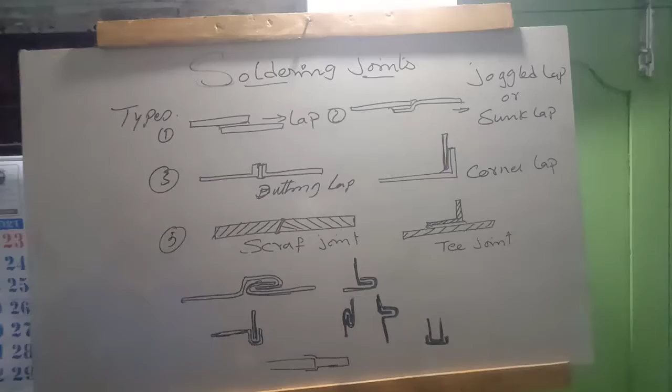Different types of soldering joints, by using sheets of different metals, we are making different types of joints.

First one is lap joint. Lap joint is where one sheet is kept on the other sheet, overlapping one over the other. This is called lap joint. In between this, the metal will creep and solder will melt. This is solder, the same way here also solder.

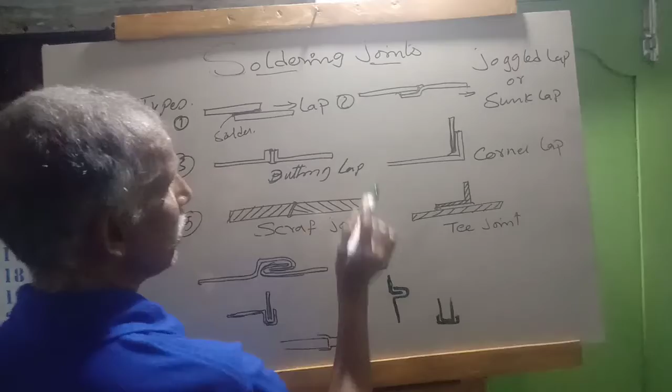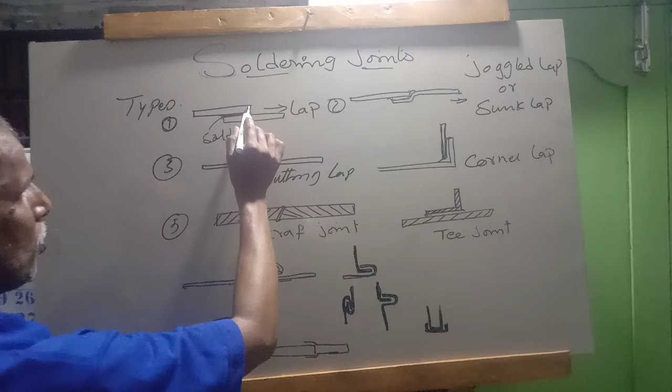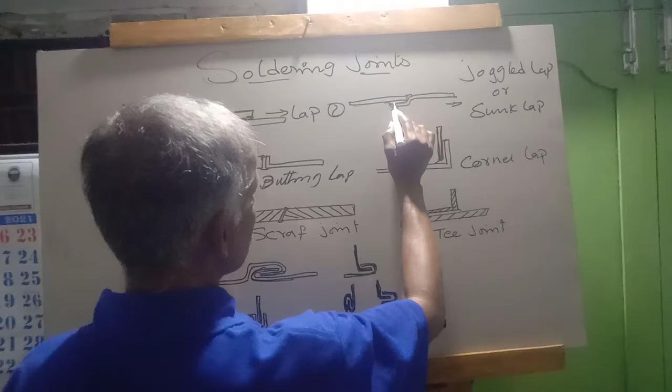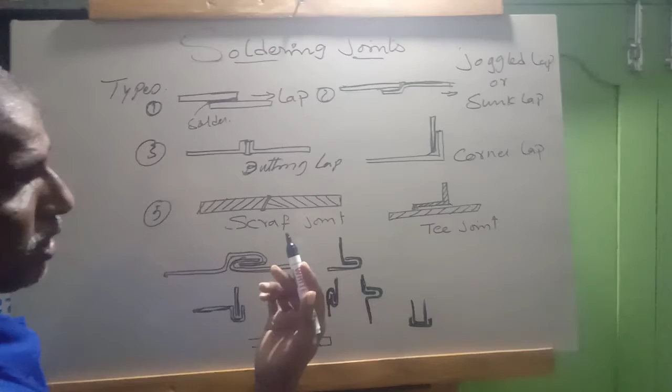Now the second one is a little different from this same lap joint. In this lap joint, a step-like portion is formed at the joint. But in this other type, the step-like portion is avoided and the sheet is bent a little bit to make the surface level. So the outside sheet will appear merged like a single sheet, but inside you will have the step. In the first type, the step-like joint will be visible; here it will not be visible, it will be merged, straight like this.

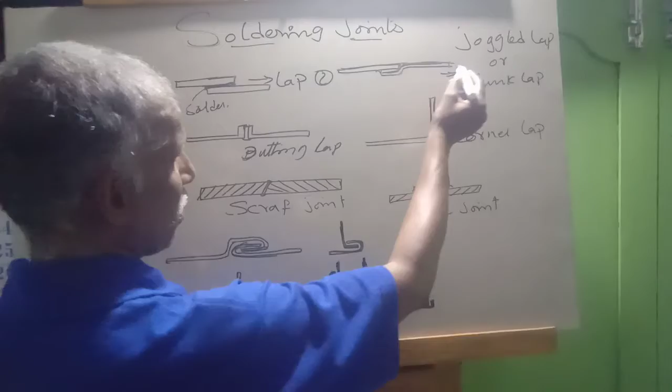So this type is called joggled lap joint or sunk lap joint. Sunk means the step is sunk.

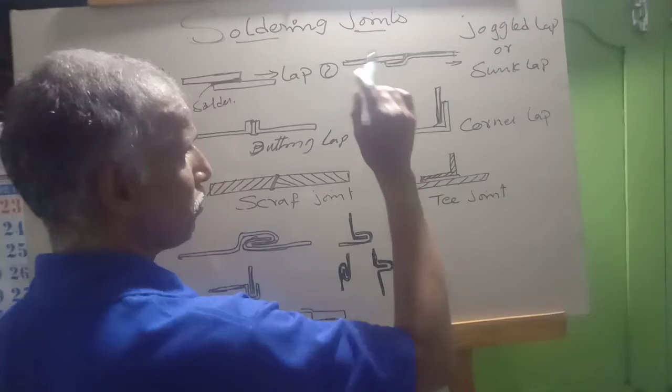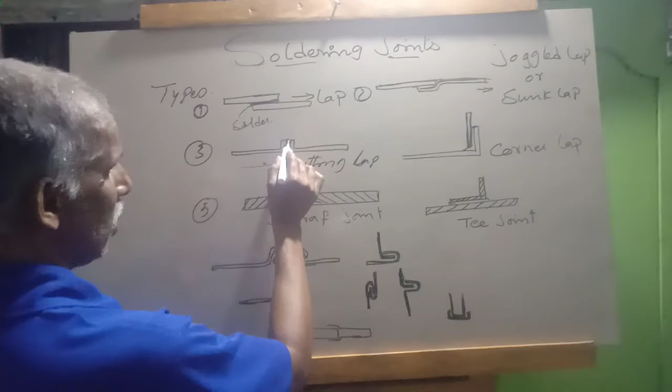Now the third one is butting lap. The two sheets are not overlapped or kept like this, the end is bent a little bit L shape on two sides, and solder goes in between this, then the joint is made in between. This is called butting lap.

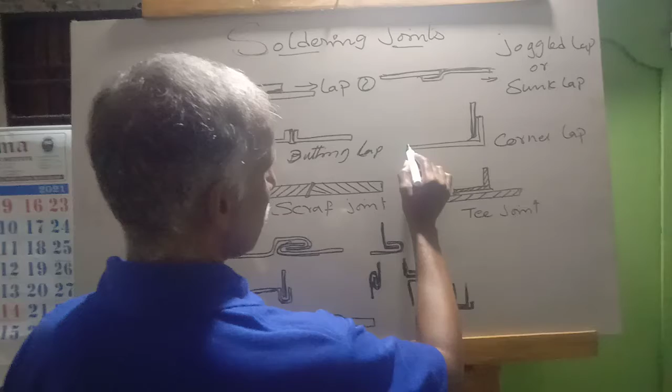This is corner lap. One sheet metal is bent L shape, another sheet metal is kept to the L shape straight, and the joint is made. This type of joint is called corner lap joint.

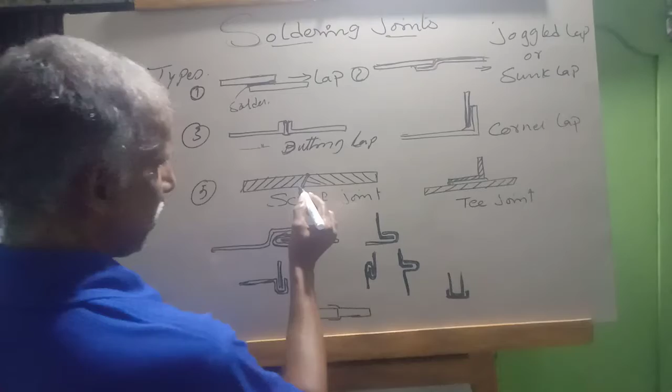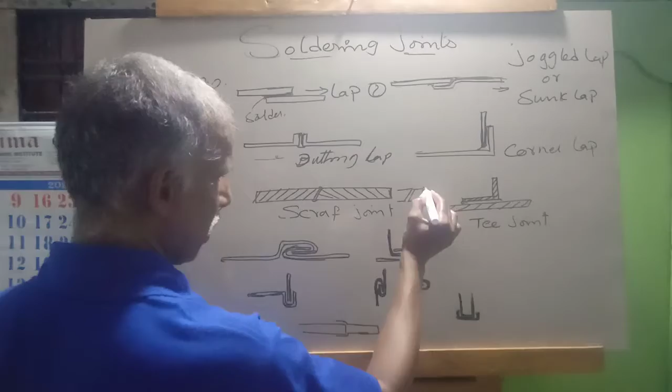Now, not in this way, but sheets of the same thickness are kept side by side and joined, but the sheet is not cut straight like this. The sheet is prepared at an angle, according to the thickness the sheet should have that angle. So this one is called scarf joint.

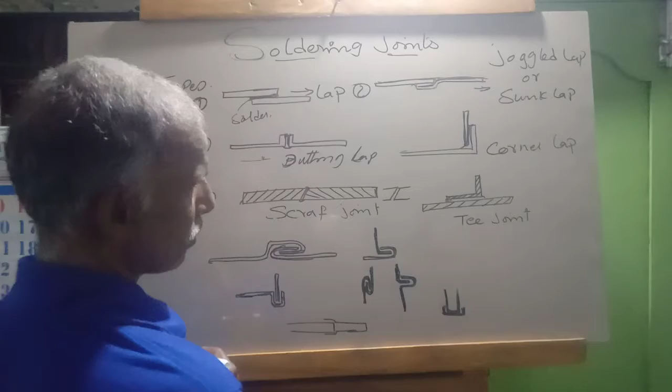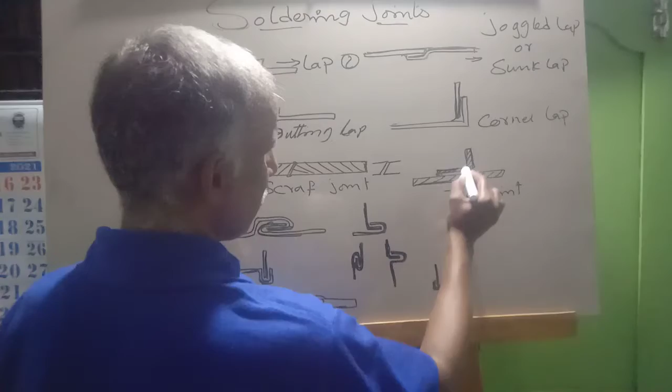The other one: a sheet metal is kept at the bottom, and over that an L-shape bent sheet is kept on top. This will form a T shape. So this joint is called T joint.

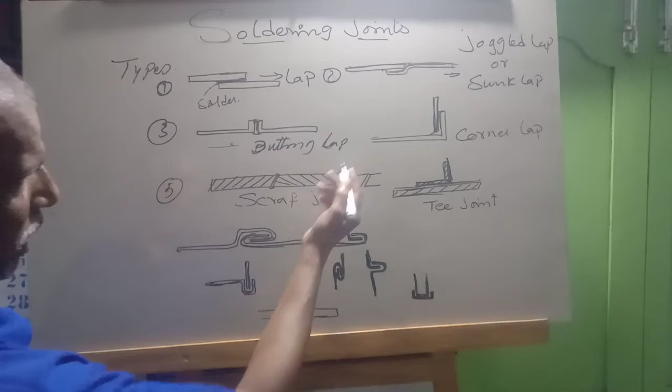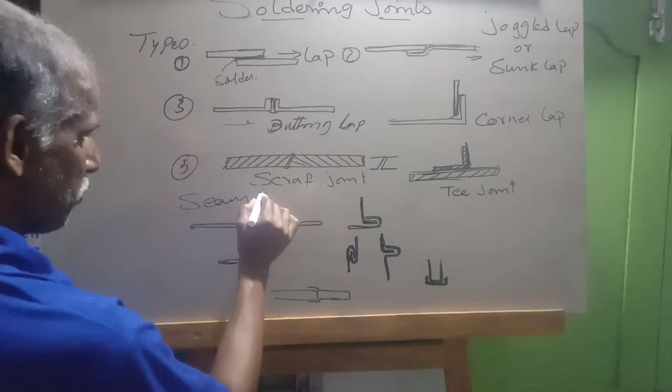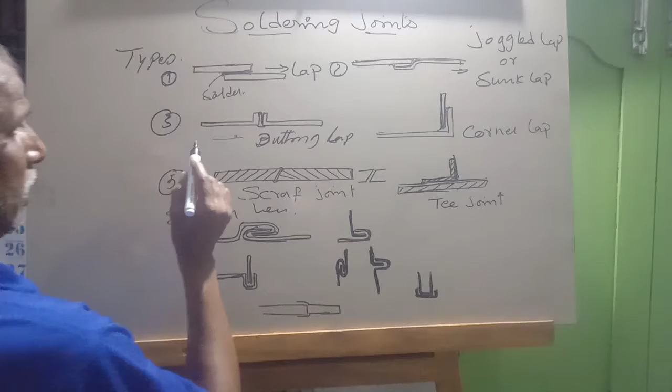This joint also - what this is explaining is that the soldering filling metal should fill in between these two sheets.

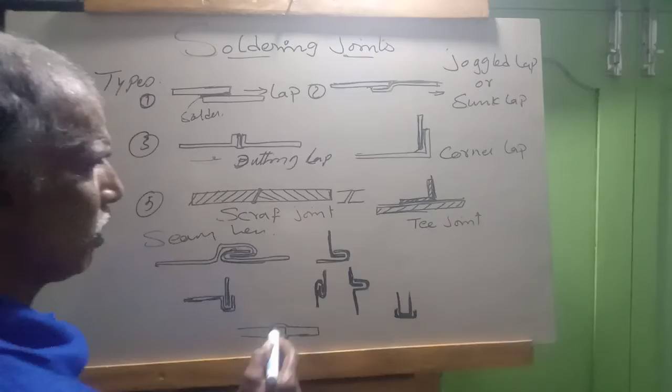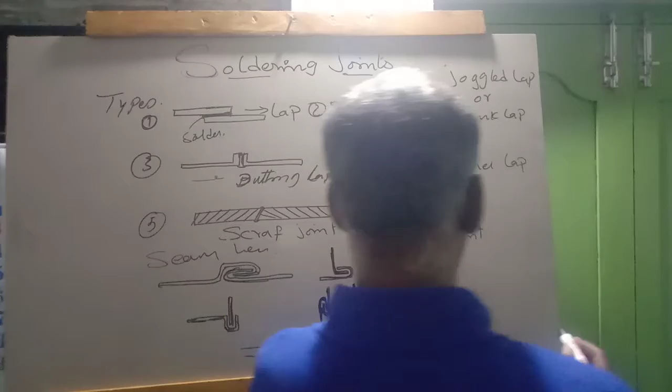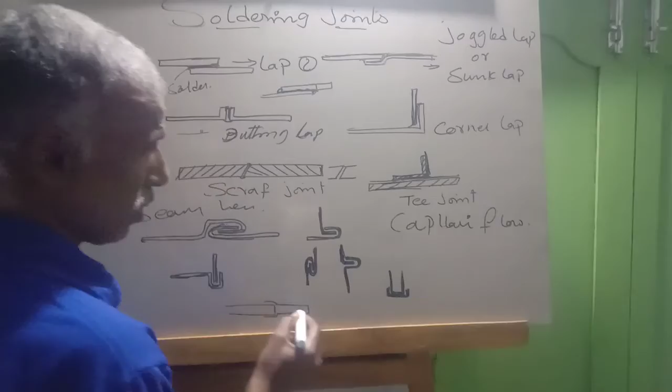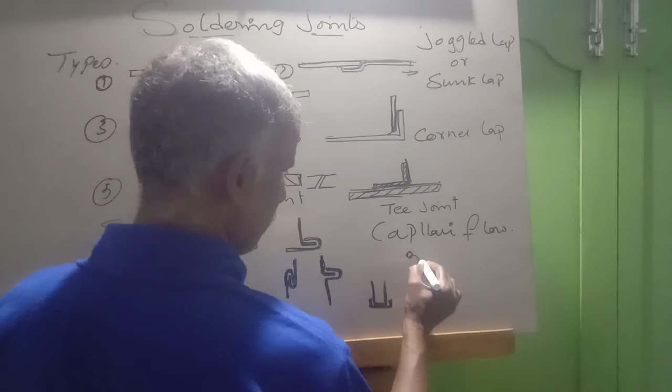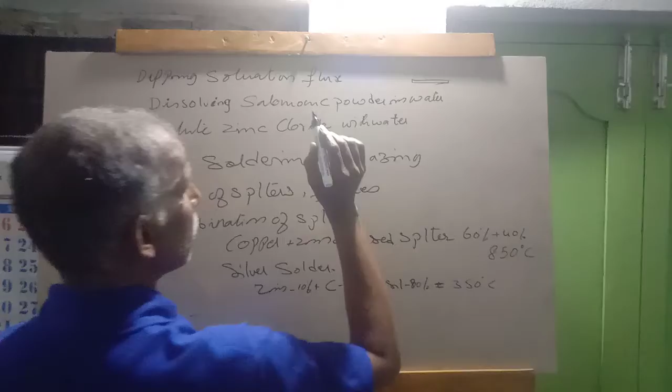This is the soldering joints. Now, for preparing the sheet for jointing with soldering, the two sheets should get prepared to join.

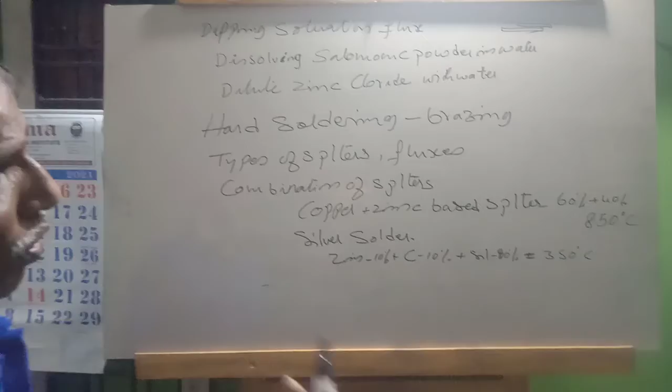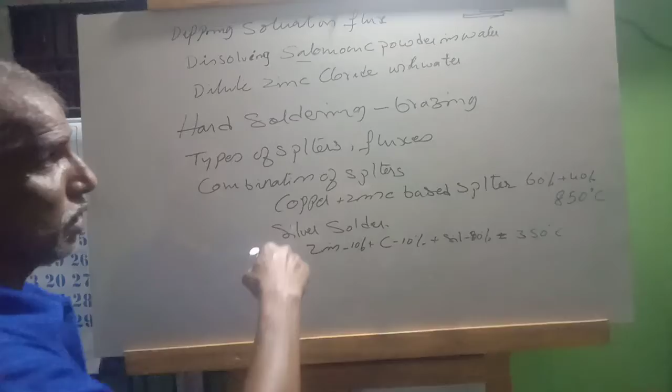It has to be dipped in a dipping solution, that is flux, in liquid state. Previously we applied the powder form, like Salammoniac and zinc chloride, which also can be used as a solution in liquid form. So Salammoniac powder is added in water, like a salt powder, it is added in water, and these two sheets are dipped into the solution for a while to remove the oxidized surface. It acts as a cleaning agent, cleans and keeps it ready.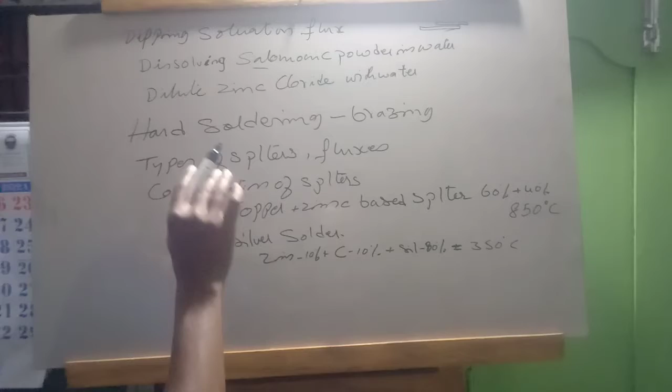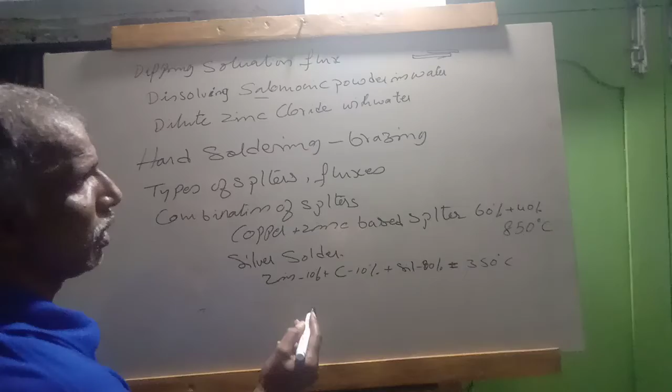Same way, dilute zinc chloride with water is also a solution in which the joining sheets are dipped for some time so the oxidized metal can be removed. That dipping solution is also one type of cleaning agent, a flux.

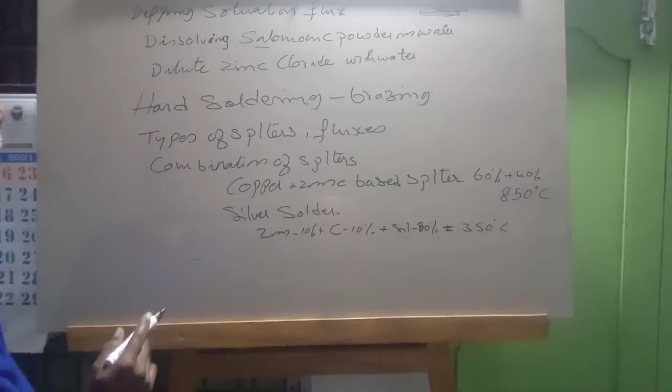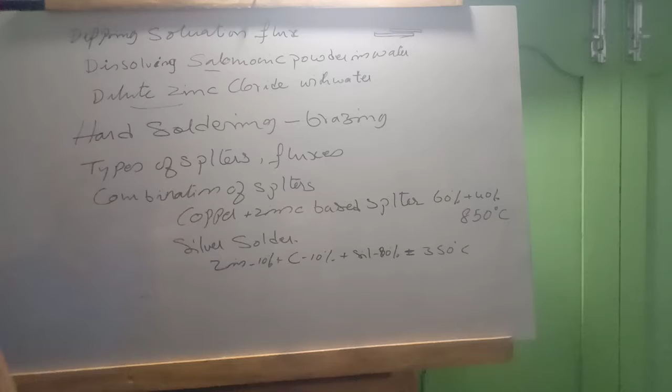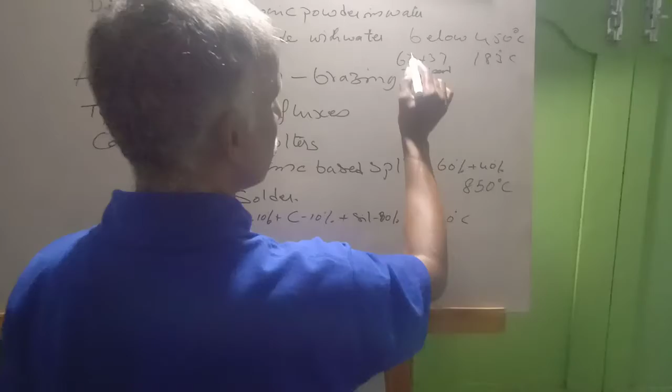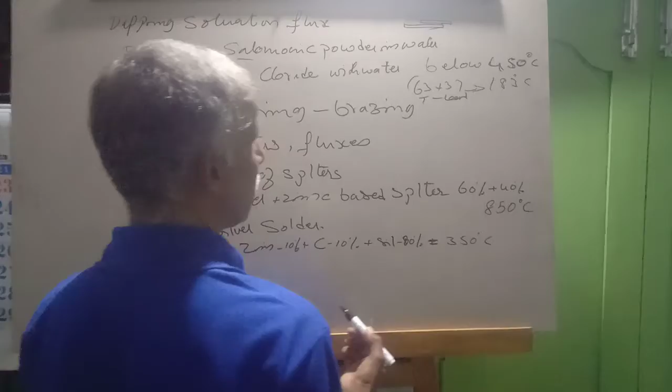Now soft soldering is over from the previous class. Now after soft soldering, hard soldering. In the beginning of the class I told you soft soldering is below 450 degrees centigrade, or at 183 degrees with 63 plus 37 percent tin and lead, this temperature is 183. So with different alloys, the temperature range goes up to 450 degrees for soft solder.

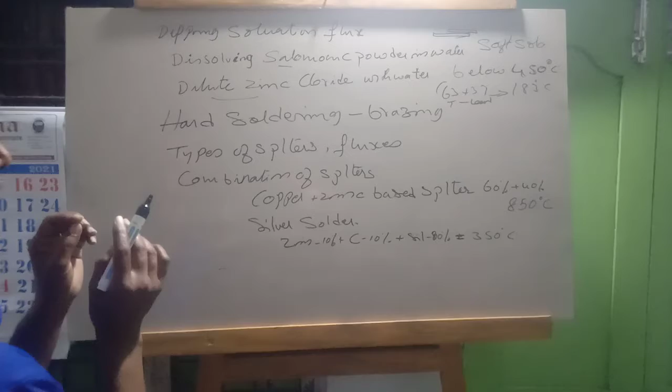Another type is hard soldering, sometimes called brazing. Here nothing is different, but the filling metal used in soft solder is a little weak, meaning it won't have a sound filling metal. That has to be used where substances are not very hot.

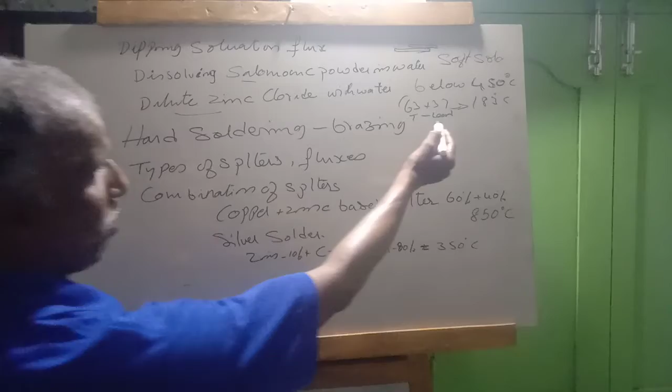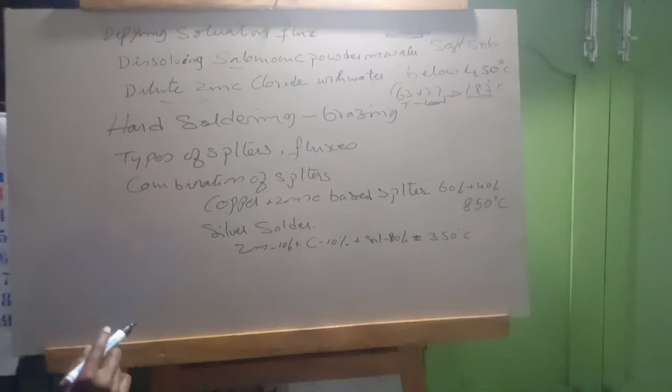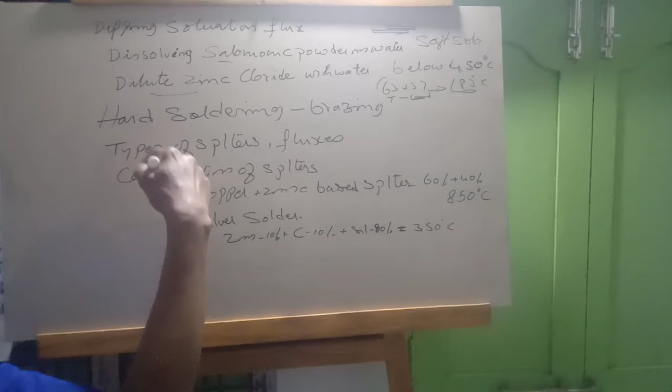Because it has a low melting temperature of 183 degrees centigrade, if boiling water is poured into the container, the joint will become weak, get cracks, and flake-like gaps will appear. To avoid that, soft soldering should be used only where heat does not exceed 50-60 degrees centigrade, below the boiling temperature of water.

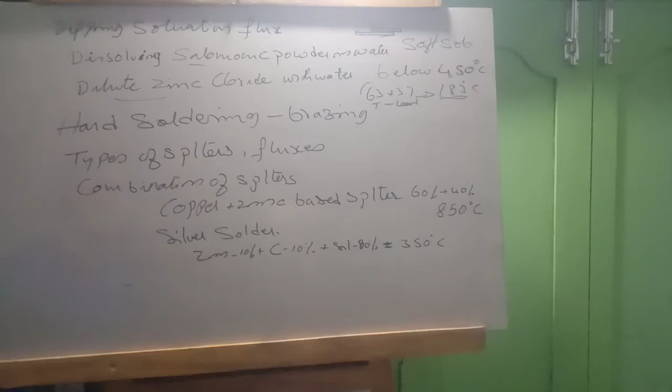Sometimes with thin sheet joint containers, liquids, gases or solids kept inside have a temperature of more than 450 degrees centigrade. If we do soldering and keep chemicals or liquids having more than 450 degrees centigrade, the filling metal of the soldering will melt and the joint will leak.

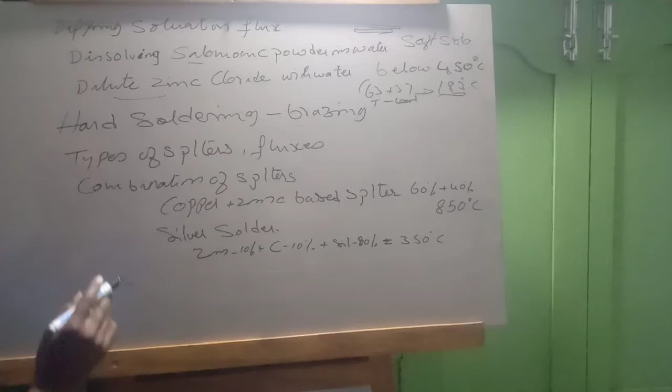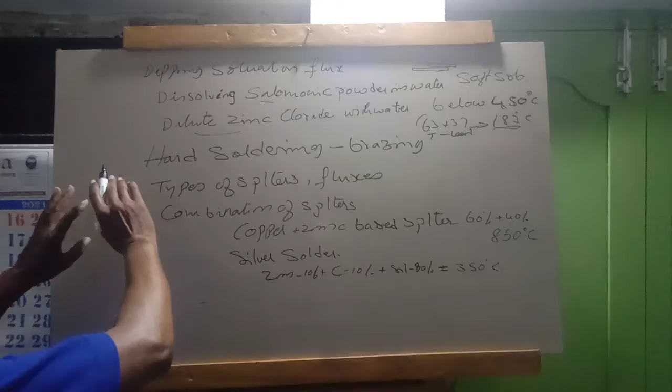So to avoid that, for temperatures more than 450, 600, or 700 degrees centigrade, hard soldering is used. That is called brazing. In this, they use types of spelters. The sheets used may be a little thicker than those used in soft soldering.

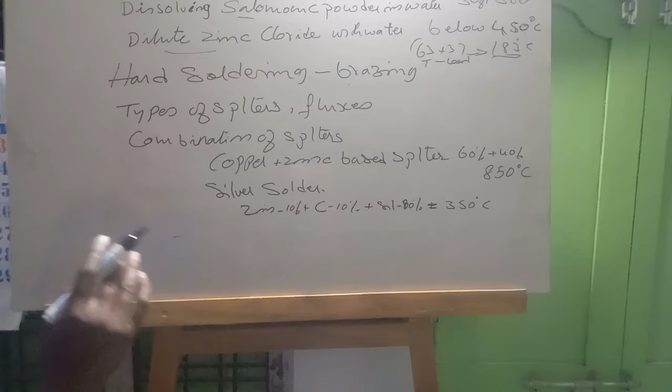But all the preparation—joint preparation, surface preparation, roughness, pickling—everything is the same. Only the filling metal differs: where we use soldering material there, here we use spelter. What is this spelter?

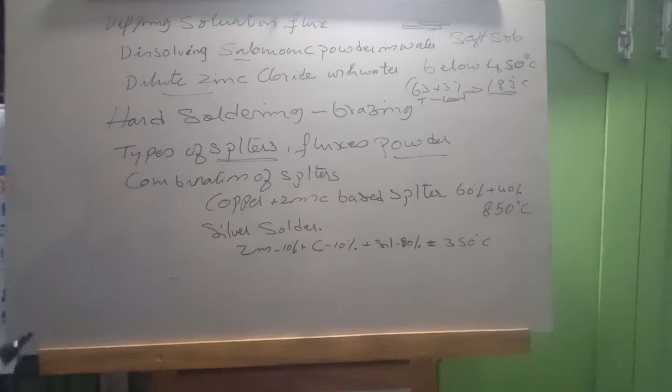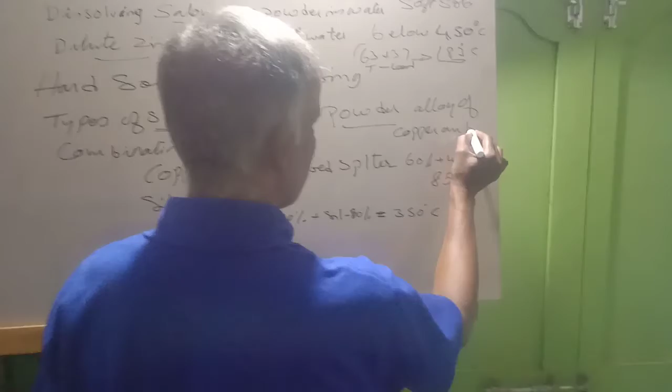This spelter comes in the form of powder, or in crystalline form, like surf or sugar, like Bombay rava—it will be in crystal form. This spelter is made by alloying copper and zinc.

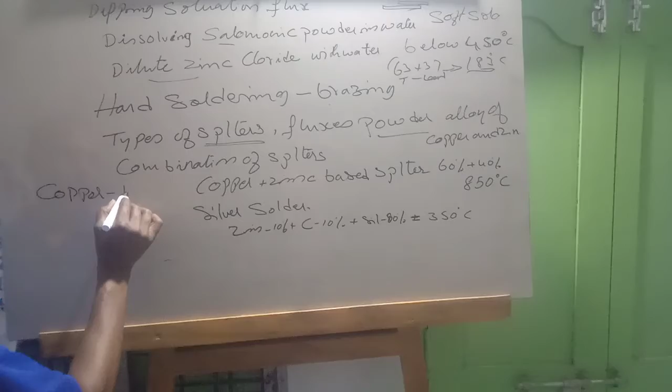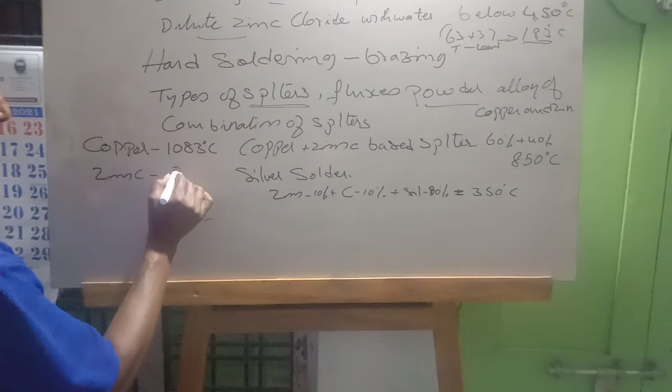Let me explain: copper's melting temperature is 1083 degrees centigrade, whereas zinc's melting temperature is 720 degrees centigrade.

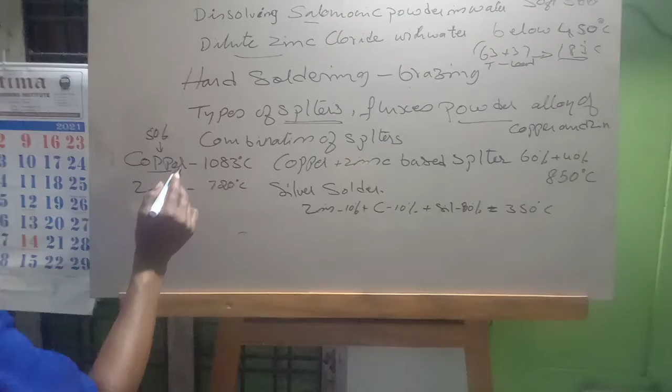Now, if we take copper 50% and zinc 50%, generally the spelter is made copper-based, meaning the percentage of copper should be more, to explain how the melting temperature of the metal varies and gets different results. This spelter made with copper has a brazing melting temperature of only 850 degrees, with 60% and 40% composition.

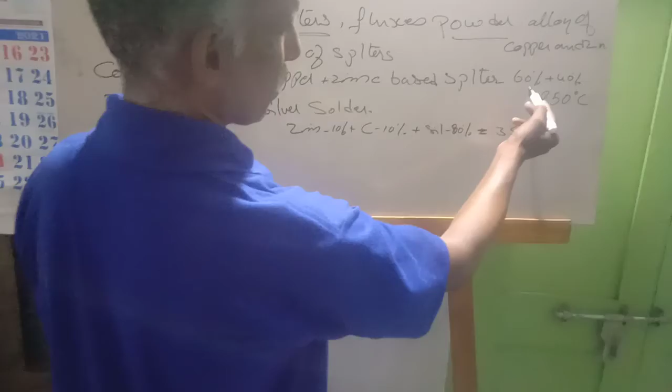Now let's check: these two metals' total melting temperature is 1083 plus 720, which equals 1803 degrees centigrade. Since we use two metals, we divide this by 2, giving us 900 degrees centigrade. So the alloy of copper and zinc at 50% each melts at 900 degrees centigrade.

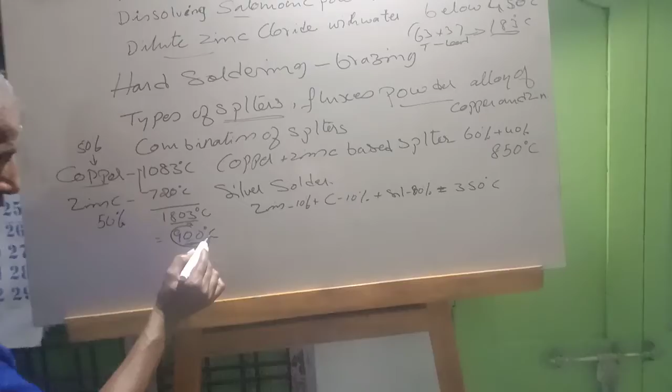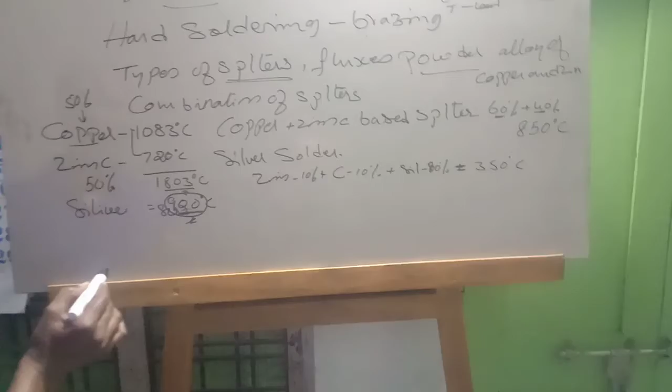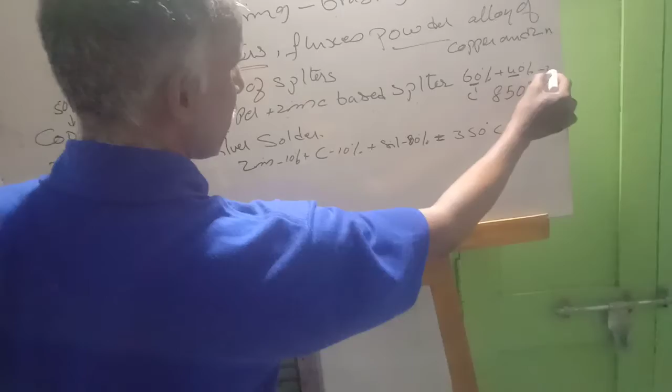When it is 60% copper and 40% zinc—a copper and zinc based spelter—when these two metals form an alloy, the spelter will melt at 850 degrees centigrade. This joint uses different spelters; different combinations of spelters exist. I told you this one combination, now here's one more.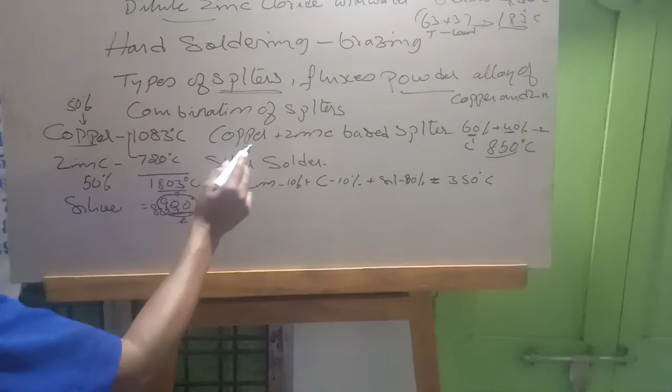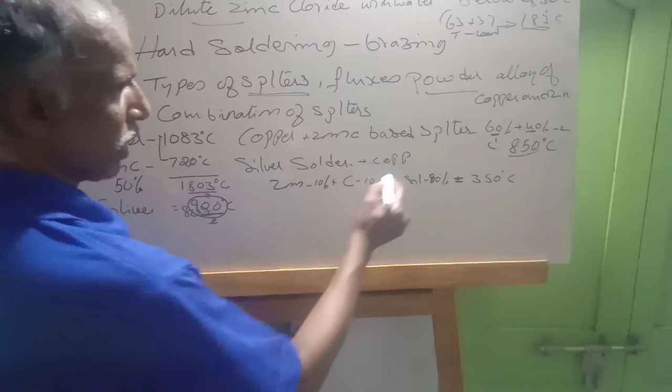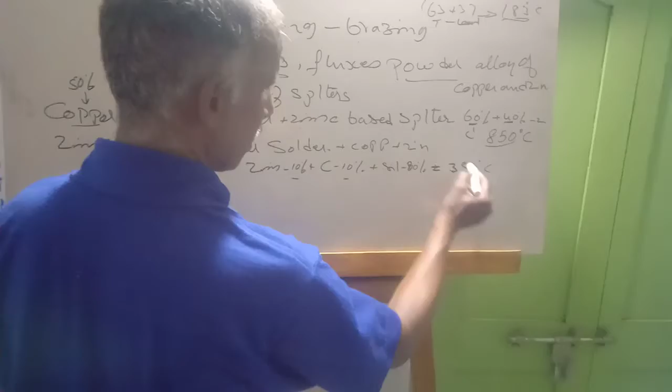Silver solder: they use silver plus copper plus zinc. Zinc is 10%, copper is 10%, silver is 80%. When all three are alloyed together, the melting temperature of this silver solder spelter will be 350 degrees centigrade. These are spelters.

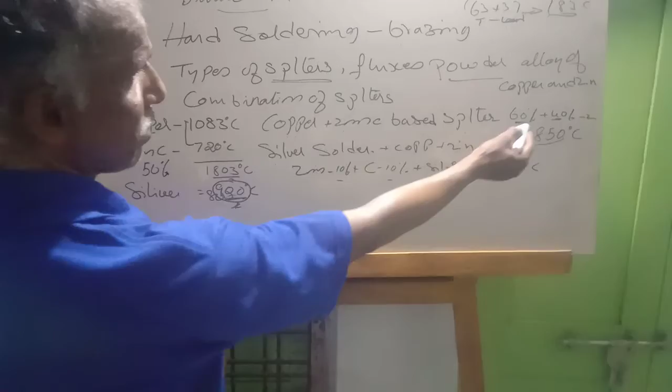This is a different combination—we saw 60 and 40, but we can also take 70% copper and 30% zinc; it varies. The joint metal should have a temperature higher than this melting point. The sheet being joined should be, for example, above 1000 degrees centigrade.

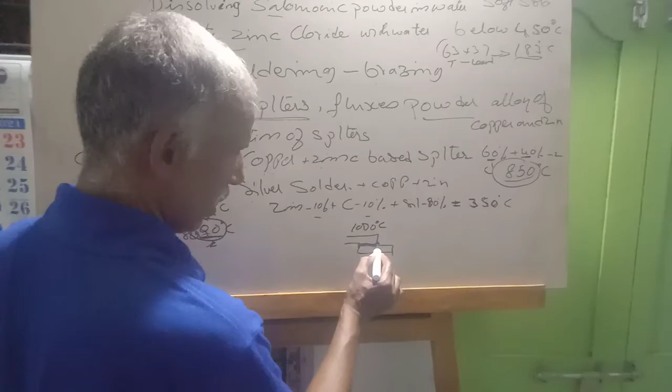What happens is the spelter to be joined will melt at 850 degrees and fill the joint, and sweating will take place, giving a perfect joint. But the metal being joined itself will not melt—only this spelter melts.

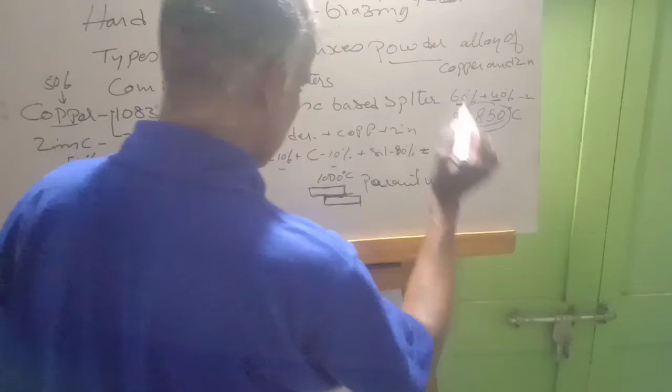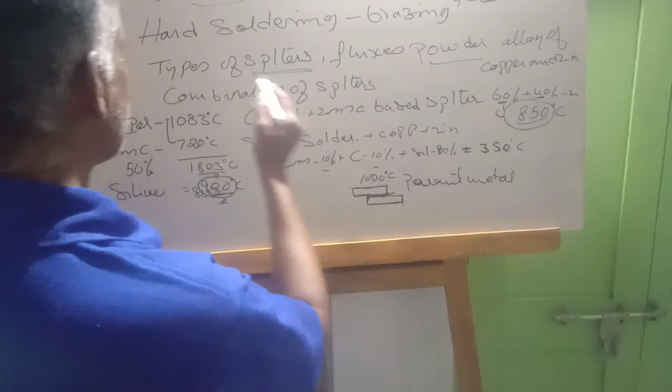Before going further, regarding how this flux melts—because of this higher temperature, this is called hard soldering. This hard soldering cannot be done using the copper bit heated in a furnace, as used for soft soldering.

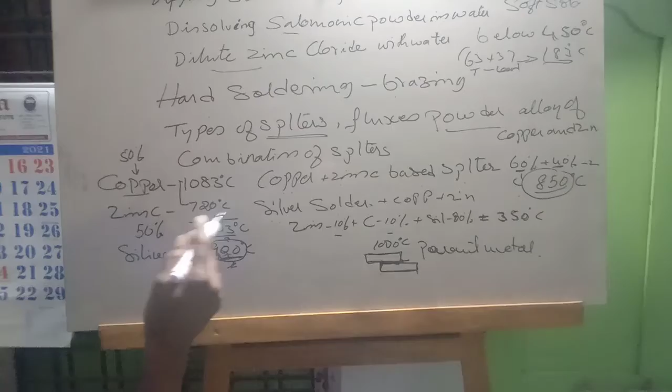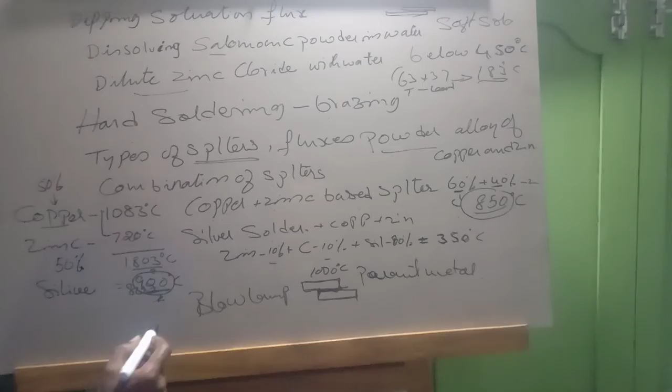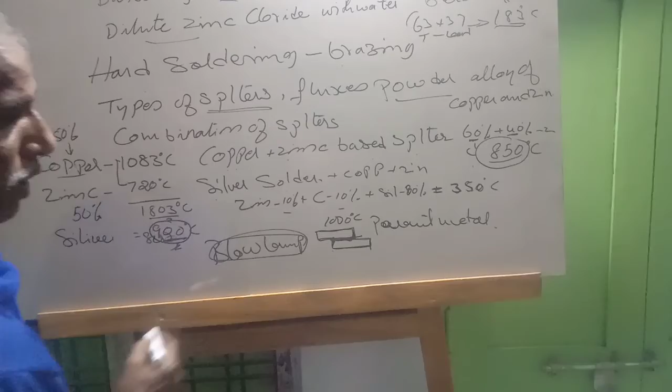Now what we use here is a blow lamp—directly where we make the joint, we use a blow lamp, which works like a kerosene stove with pumping, and it will reach this melting temperature. We also use oxyacetylene gas, meaning a gas welding torch, for melting during the brazing purpose.

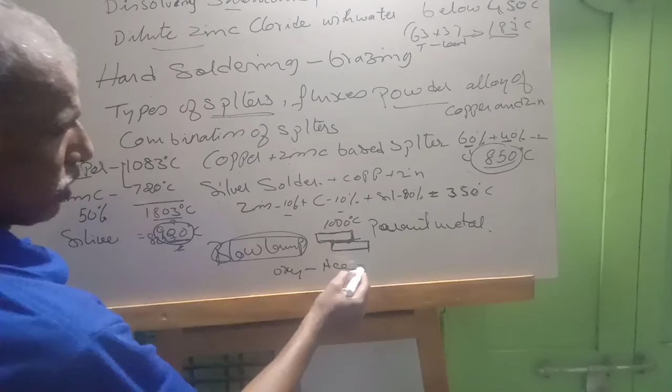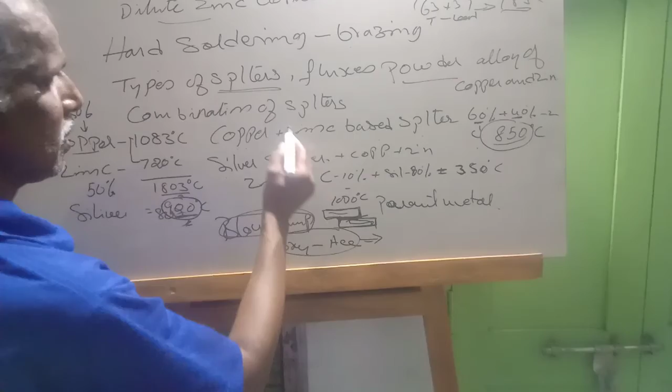Here oxygen and acetylene gas are combined together using a torch. These two gases, with the help of a torch, create a flame that heats the two surfaces of the metals to be joined, and the filler metal spelter is supplied there too, for sweating and cleaning purposes, acting as a solvent. This is a hard solder.